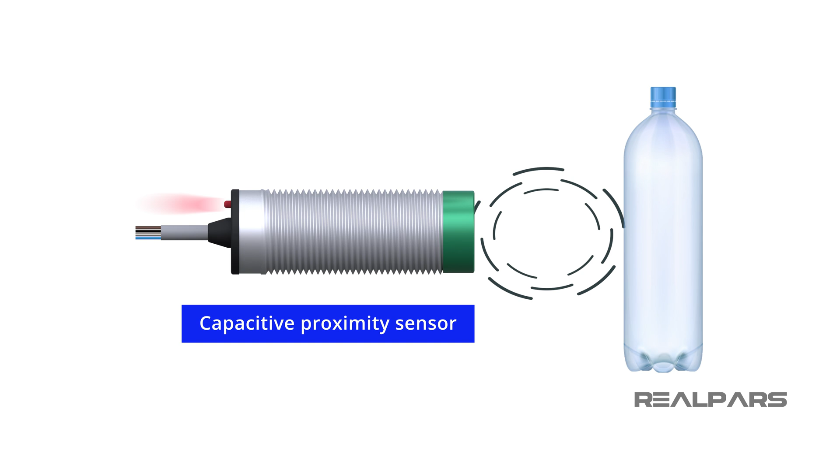In this video, I will be talking about capacitive proximity sensors. I will explain what a capacitive proximity sensor is and how they work. I will also talk about some of the different types of materials these sensors can detect, explain the main parts of these sensors, talk about some of the different types of capacitive proximity sensors, and give some examples of how these sensors are used with automation.

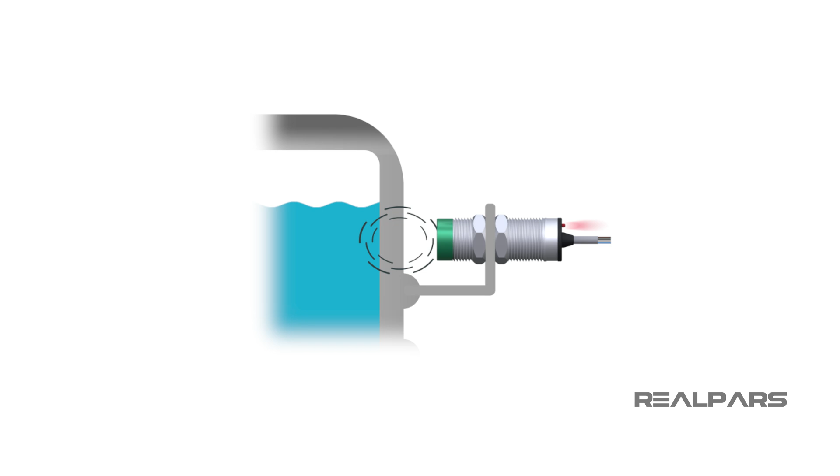A capacitive sensor is an electronic device that can detect solid or liquid targets without physical contact. To detect these targets, capacitive sensors emit an electrical field from the sensing end of the sensor. Any target that can disrupt this electrical field can be detected by a capacitive sensor.

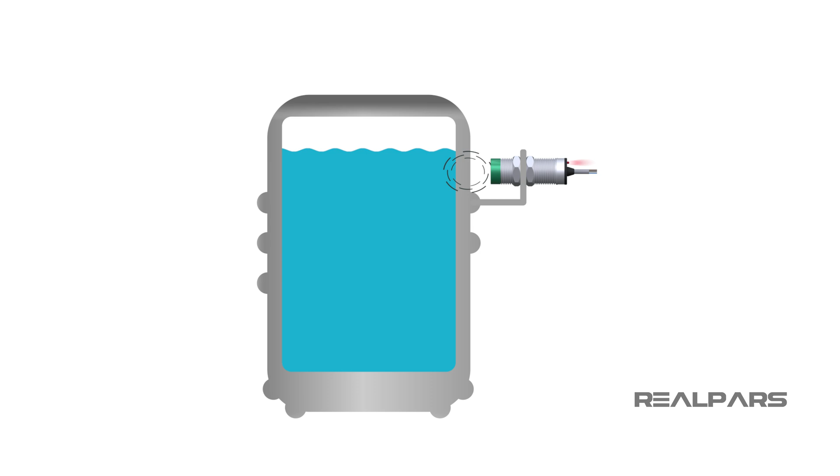Some examples of the solid materials a capacitive sensor can detect are all types of metal, all types of plastic, wood, paper, glass, and cloth. Capacitive sensors can also detect liquids like water, oil, and paint.

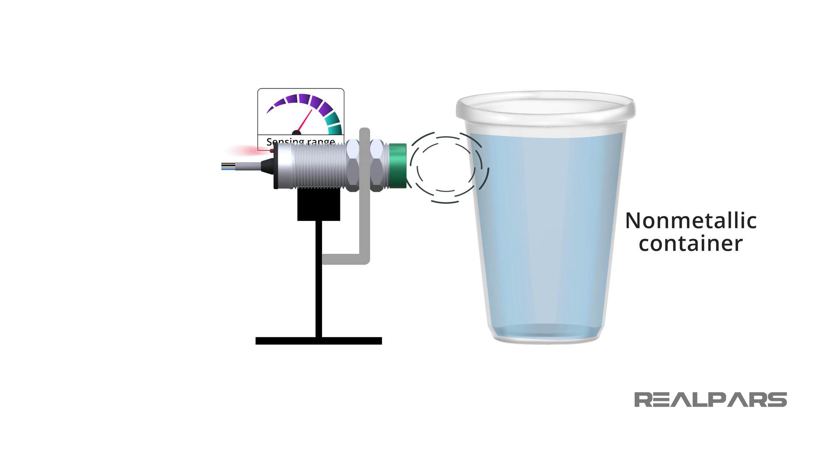Some capacitive sensors can be used to detect material inside a non-metallic container. The capacitive sensors used to do this have an adjustable sensing range. I will explain how to adjust these types of capacitive sensors with an example in just a bit.

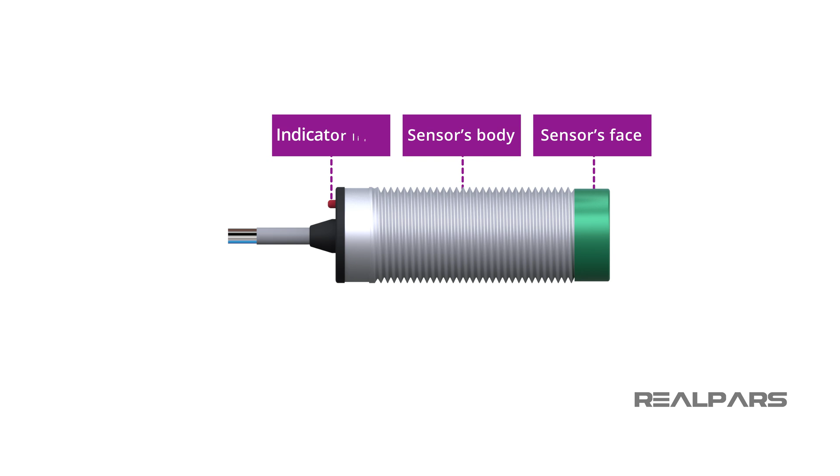Capacitive sensors have four main parts: the sensor's body, the sensing face, the indicator light, and the cable or cable connection end. If the sensor has an adjustable sensing range, it will also have an adjustment screw to adjust the sensing range. Inside the sensor's body is where the circuitry is that makes the sensor work.

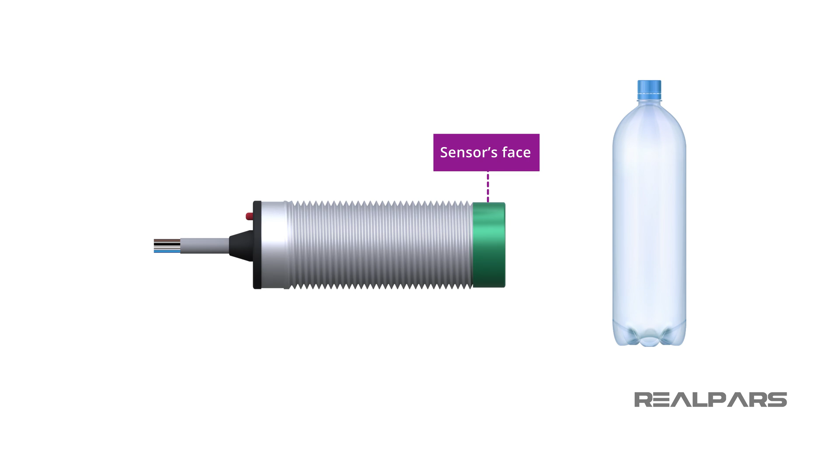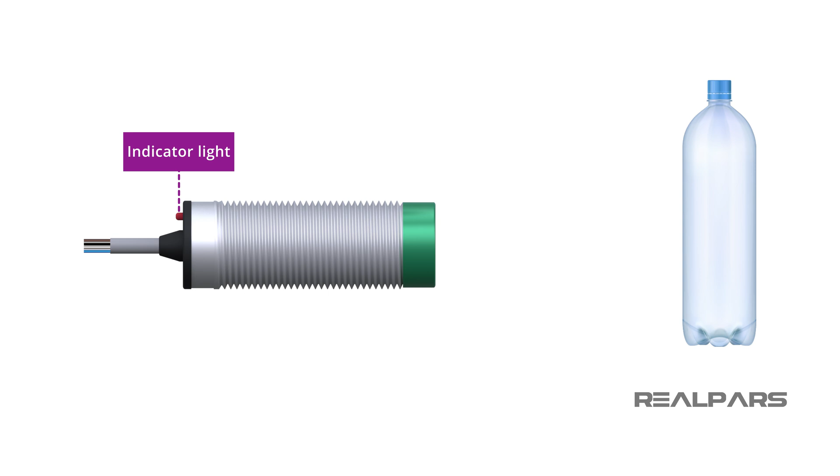The sensing face is the part of the sensor that is used to detect the targets. The indicator light is on the other end of the sensor from the sensing face. This light turns on when a target is within the sensor's sensing range and turns off when the target is out of sensing range. The sensing range of a capacitive sensor is the maximum distance a target can be detected from the sensor's sensing face.

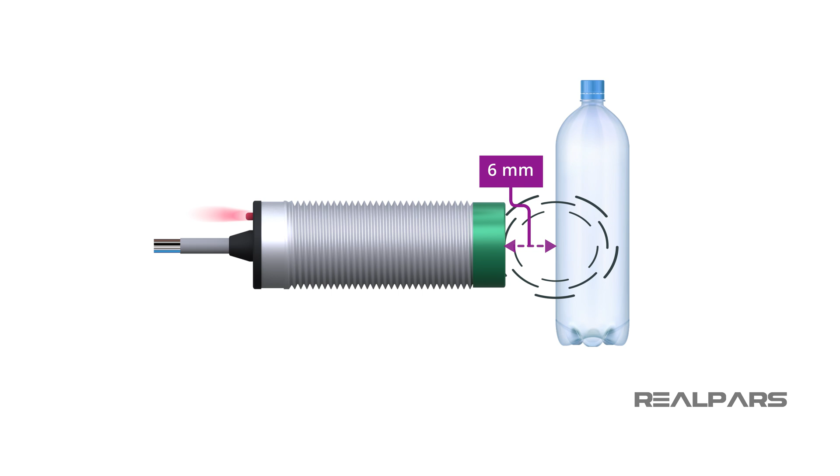An example of being within the sensor's sensing range would be if the target is 6 millimeters away from the sensing face and the sensor's sensing range is 12 millimeters. The sensor's sensing range can be found on the datasheet of the sensor, or you can look it up on the manufacturer's website.

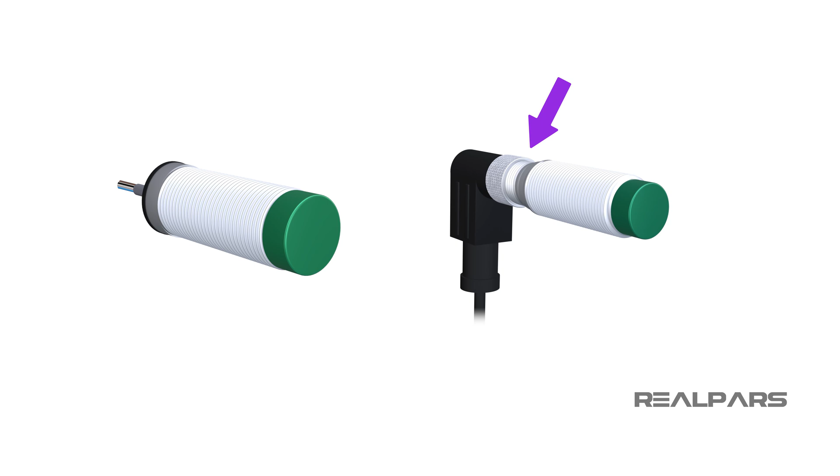These sensors can be purchased with a cable already attached to them, or they can have a connector that the cable screws into. In this cable, you will find 4 wires. The colors of these wires are brown, blue, black, and white.

The brown wire gets connected to 24 volts DC positive. The blue wire gets connected to 24 volts DC negative. The black and white wires are the sensor output wires.

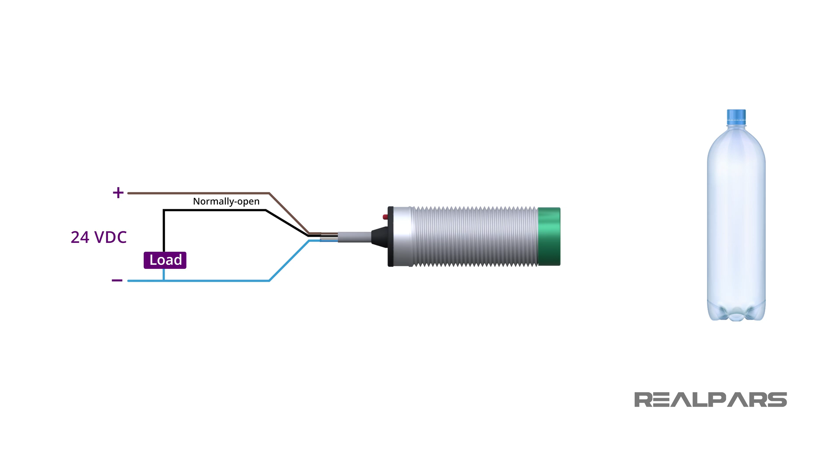The black wire is the sensor's normally open output wire. The sensor will send out a signal on the black wire when it detects the target. The sensor stops sending this signal when it does not detect a target.

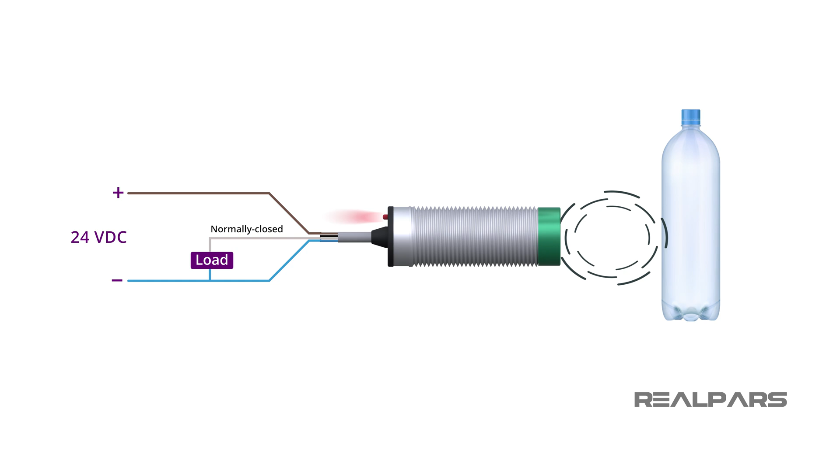The white wire is the sensor's normally closed output wire. The sensor will send out a signal on the white wire when it does not detect a target. The sensor stops sending this signal when the target is detected.

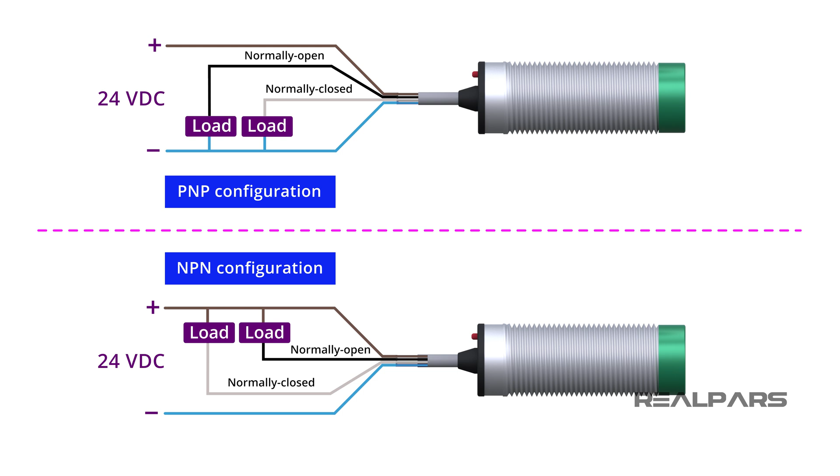A capacitive sensor's outputs can be a positive signal, or PNP, or a negative signal, or NPN. Depending on how the sensor outputs will be connected will determine what style of sensor outputs are needed.

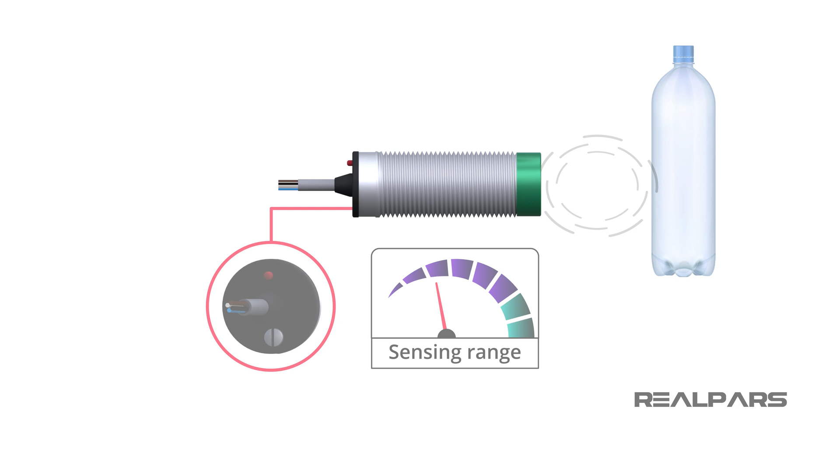If the capacitive sensor has an adjustable sensing range, it will have an adjustable screw. Turning the screw clockwise increases the sensitivity of the sensor, and turning the screw counterclockwise decreases the sensitivity of the sensor. Mounting a capacitive sensor can be easy.

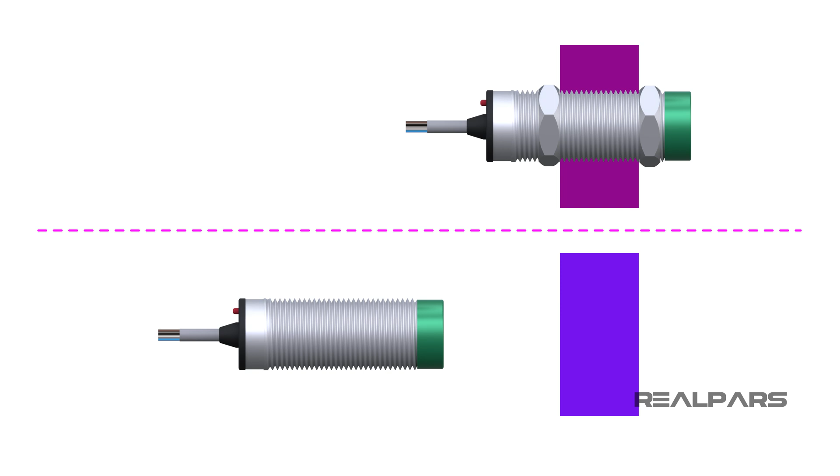It mostly depends on how the sensor is going to be used and where it's going to be located. Some styles of capacitive sensors can be mounted by just bolting them into place. Other styles can be mounted by drilling and tapping a hole the same size as the sensor, and sometimes using a bracket to mount the sensor is the best solution.

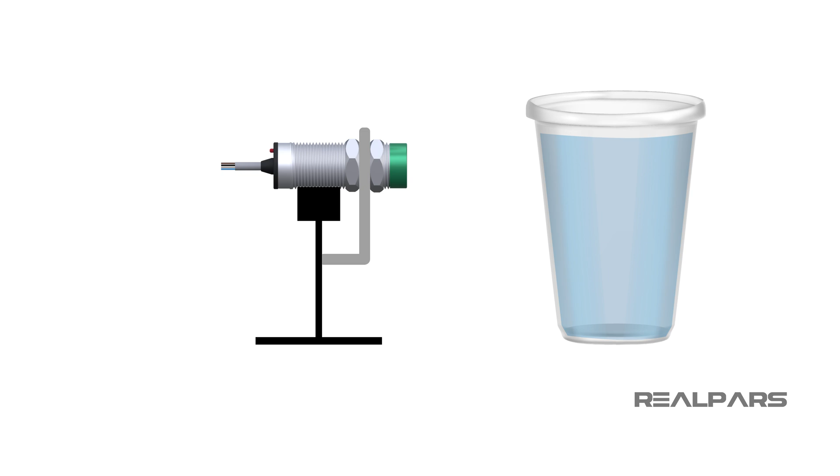Now, I will explain how to set up a capacitive sensor to detect water in a non-metallic container. In this example, I will use a drinking glass made out of plastic for the container and a capacitive sensor with an adjustable sensing range that is mounted on a post to detect the water.

Notice when I put the empty drinking glass next to the sensor, the indicator light turns on. This means the sensitivity of the sensor is set too high and will need to be adjusted. To adjust the sensitivity of the sensor, turn the sensitivity adjustment screw counterclockwise until the indicator light turns off.

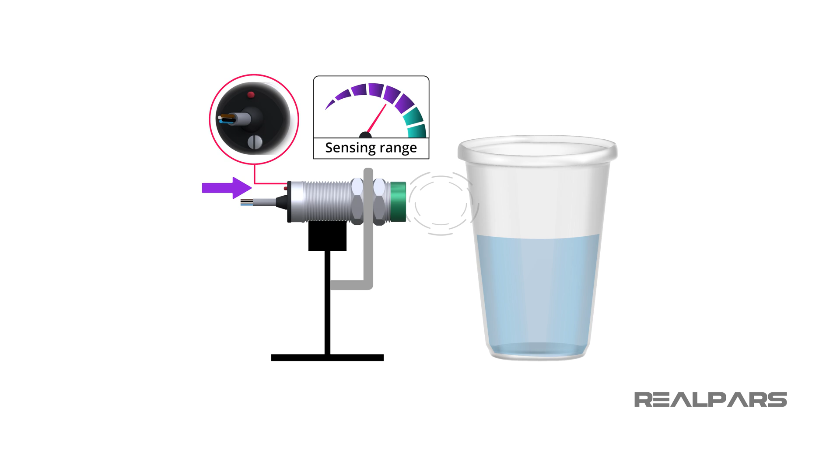Now, I will fill the drinking glass with water up to the sensor. Notice the indicator light turns on. If I remove some of the water to where the level is below the sensor, the indicator light will turn off. This means that the capacitive sensor is adjusted correctly.

Capacitive sensors can be used in many ways. They can be used for part detection on workstations, conveyors, and robots. They can also be used for counting and checking liquid levels.

When these sensors are used for part detection, the sensor just sends a signal to the workstation, conveyor, or robot so they know when the part is there.

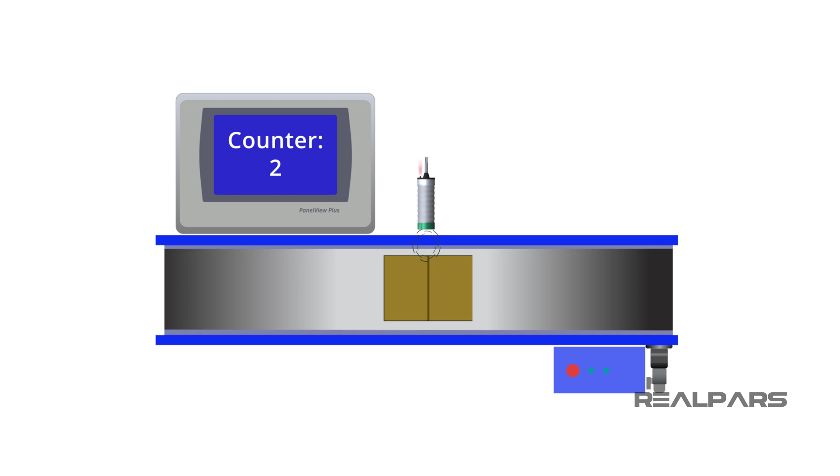A capacitive sensor can be set up on a conveyor to trigger a counter so that it can count how many parts have been built. Capacitive sensors can also be used to check for high or low tank fluid levels and to trigger alarms for each.

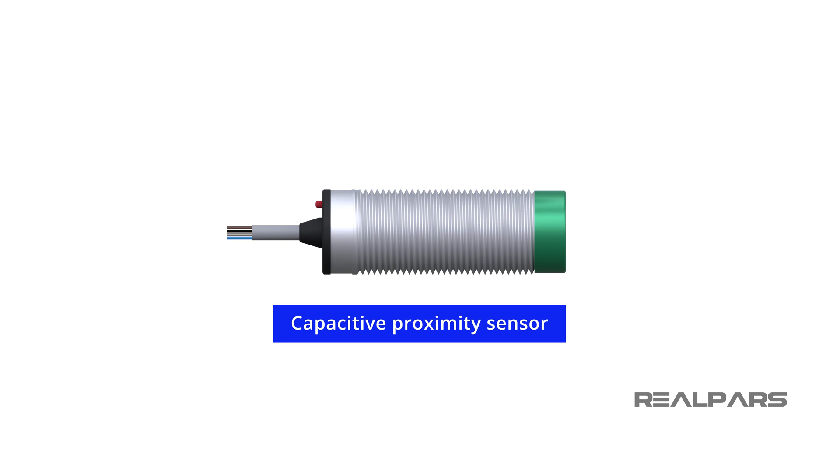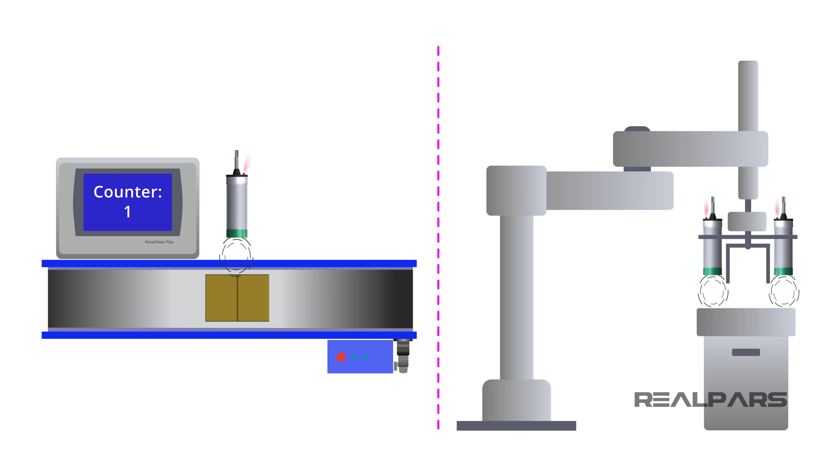In review, by watching this video, you have learned about capacitive sensors, that they detect most solid or liquid targets without physical contact by creating an electrical field. You learned the four main parts of a capacitive sensor and that they have many different options to fit the needs of most applications. That should do it for this video.